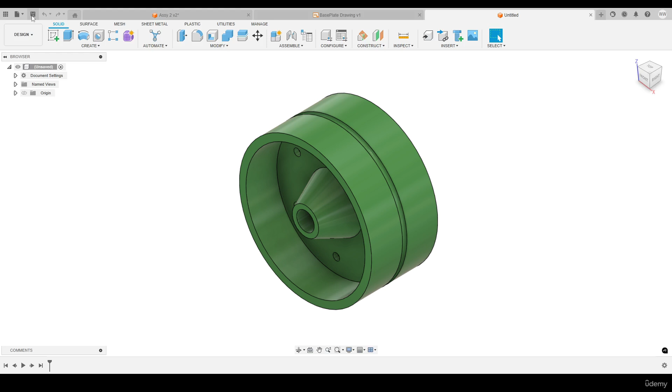So that leads us on to our final part, the pulley wheel. These are the dimensions of the part here. If you would like to model this yourself, please feel free to do so. Aside from that, I will now have a go at modeling this part myself.

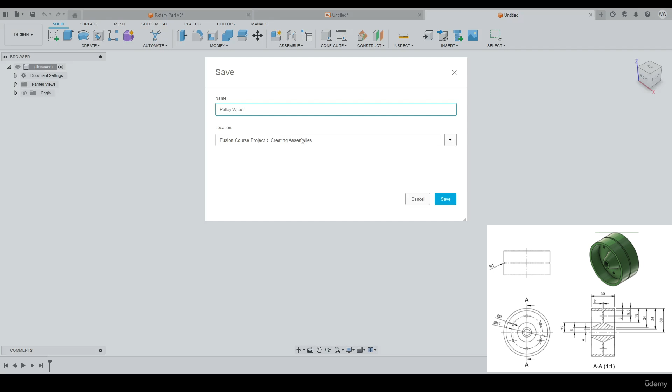So let's jump into Fusion, and first of all, let's click Save. Let's title this Pulley Wheel, and make sure it's in the correct location under our project folder. Hit Save. And let's start a sketch, and we're going to do this on the same plane that we drew the pin on. That's the correct orientation. So that's the YZ plane.

Select that one. And from here, the first thing I'm going to do is put in a construction line, and this is going to be our axis of revolution. So just like the pin, we're going to revolve this part. We're just going to draw a profile and revolve that around the line I'm about to draw in now. I want that to be a construction line. Just going to put in a dimension there of 40 mil. Lower that dimension down there, and the construction lines off.

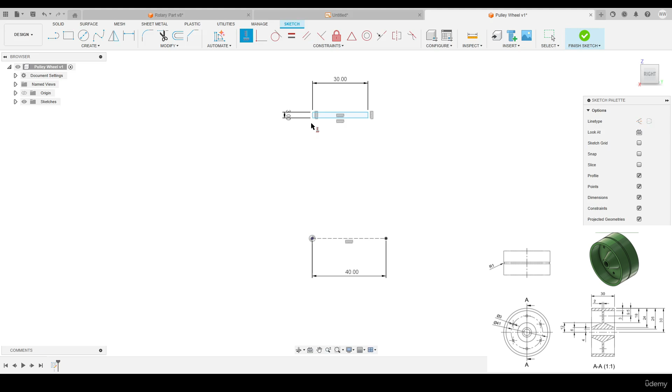All right, let's work from the top because that's quite easy then. So we've got a rectangle up here. It's got a width of 30 and a thickness of 3. Put that in the right position. So I'm going to constrain that vertically to the origin, and I'm going to put in a dimension there from the top corner point to the origin. And as per the drawing, that's 30 mil. Looking good.

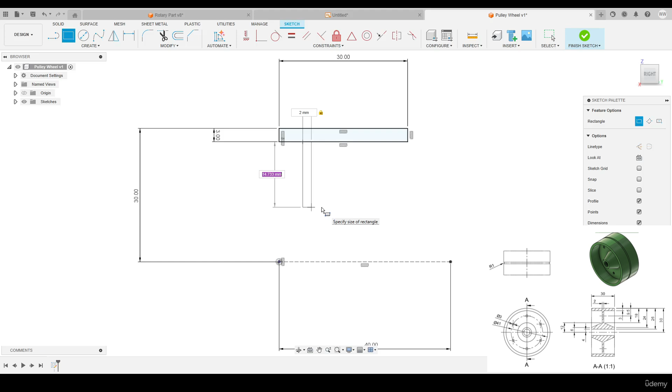Let's continue with the rectangle tool then. I'm going to snap on anywhere on this line now. Put in the width here, which is 2 mil, and the length here, which is 18 minus 3, that's 15. Okay, and now we can only move it across like this. Let's go ahead and put in a horizontal constraint. On the center point of this line, hold down Shift, select that. There we go. And I want to constrain it horizontally with the midpoint of this line. So everything there should be fully constrained. Got a red padlock. Okay, good so far. Move that dimension out of the way.

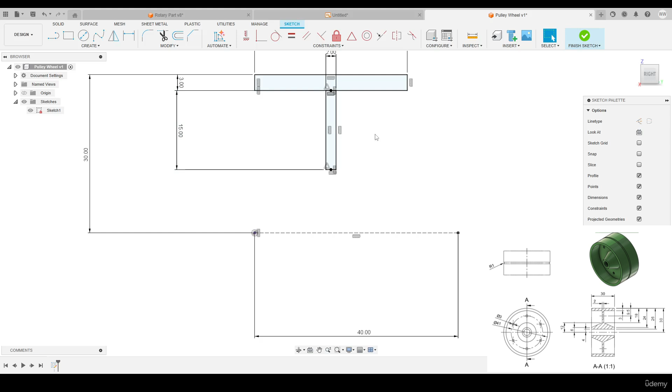And from here, let's use the line tool. I'm going to start from this corner point. I'm going to come down here roughly. I'm just going to put in the rough geometries like so, something like that. And then we'll tidy those up. So let's go with the vertical constraint. I'm going to select this point to this point. I'm going to go ahead and dimension from this point to here. In the drawing, we're given that dimension as 24. And then this point to the top corner point, we're given that dimension as 26.

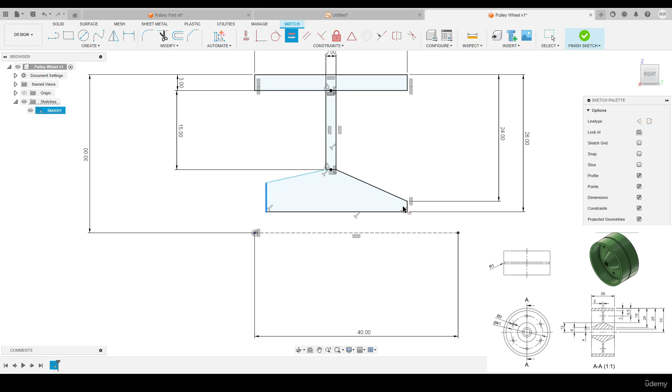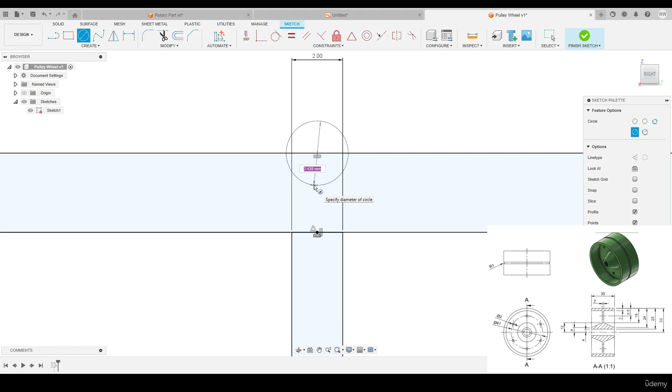Okay, looking good. I want to put in an equal constraint between this line and this line here. They are the same height. And we just need to put in a vertical constraint between the origin and this point here. And there we have our profile. One more detail to add, and that is the arc down here. So to do that, I'm going to use the circle tool, press C on the keyboard, snap to the midpoint of that line. I've got a radius of 1, so diameter of 2. Okay, that's good. So we've got one profile here, one here, and one here. That's fully constrained. We've got our axis of revolution here.

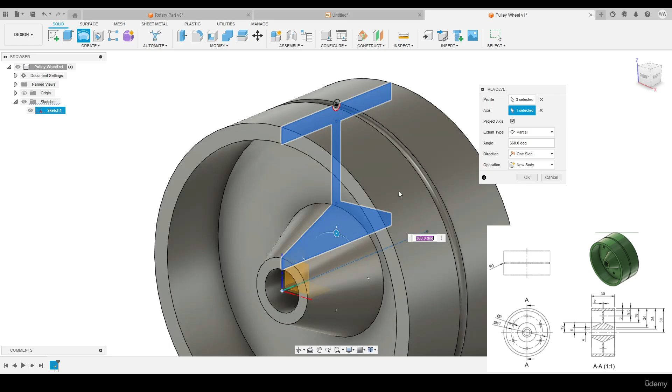Let's finish the sketch. Go into solid, hit the revolve tool. And then from here, select our profiles. So 1, 2, 3. Okay, we just want those 3. And under the axis, let's select our construction line here. Let's just have a quick look at that preview. That's looking good. That's what we're after. Okay, nice. Full 360 degrees. Direction one side. And operation new body. Okay.

Okay, just one more feature to add, which is the holes around this face here. So let's press C on the keyboard. I'm going to select this face here to draw those holes on. Start with the circle tool. And let's input the pitch circle diameter, which we're given in the drawing as 41 mil. I'm going to make that a construction line. Okay, click once. Turn off the construction line. And then we'll stay in the circle tool. I'm going to draw in a circle here with a diameter of 3 mil. I want to use the vertical constraint, center point of the circle to the origin.

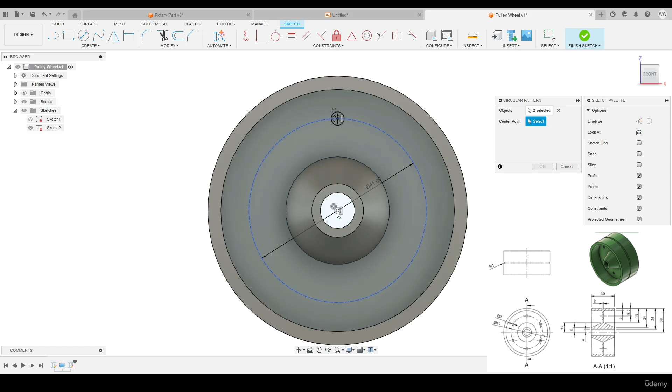That's now fully constrained. Now we can go into the create tools, circular pattern, drag around our circles, and the center point, that will be the origin. Quantity, we've got 3 plus 3, that's 6. Okay, that's looking good. Let's finish the sketch there.

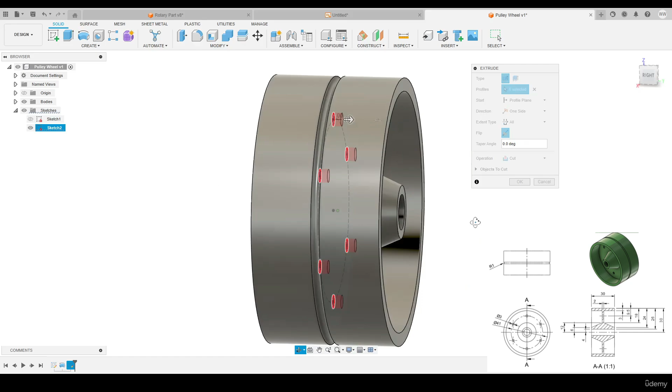Come into solid, extrude, profiles. Let's select these 3 and these 3. It needs to be a cutting operation, so I'm going to move the arrow across. And in terms of the distance, I'm just going to select all. That will cut only the material in that extrusion's direction. The preview looks good. Let's press OK. There we have our completed pulley wheel.

Go ahead and add an appearance to that. A on the keyboard. And this one, I'm going to go for a paint glossy, enamel glossy green. Drag that over the existing one, replace that. There we have our complete part.

Yep, I hope that was okay and you were able to follow along okay. And again, if you did that yourself, a big well done. And now we're about to move on to assembling these parts together.